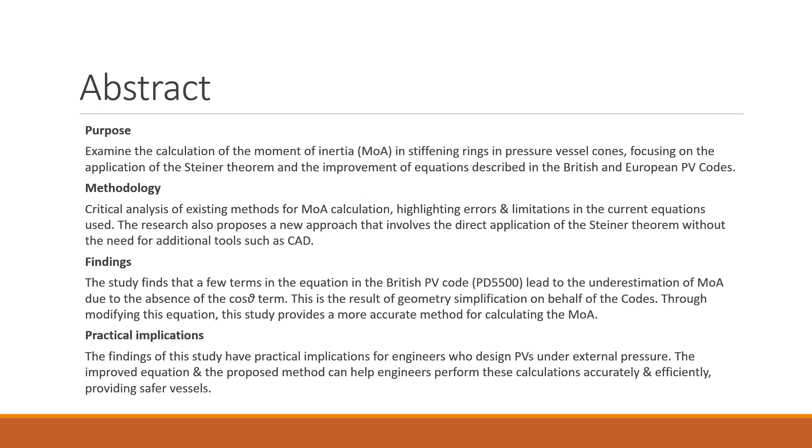As I mentioned earlier, the purpose of this study is the calculation of the moment of inertia in stiffening rings in pressure vessel cones, focusing on the application of the Steiner theorem and the improvement of the respective equations in the British and European pressure vessel codes. Let me begin with some background on pressure vessels and why accurate structural analysis is so important.

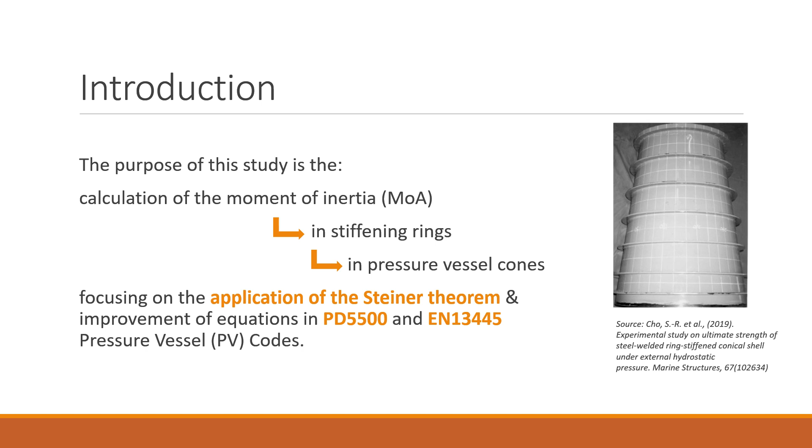Pressure vessels are critical containment components used across many industries to safely store, transport, and transfer compressed gases and liquids. They feature a hollow cylindrical or spherical shell designed to withstand various pressures. As material and manufacturing costs rise, thinner vessel walls are often specified to reduce weight and expenses. While this leads to lower capital expenditures, it also magnifies the need for reliable structural analysis during design.

Thinner shells are more prone to deformations like buckling if not properly reinforced. This is where stiffening rings play a key role. Stiffeners are structural elements attached around a vessel's circumference to enhance its integrity under pressure loads. Proper sizing and positioning of these rings is essential to prevent catastrophic failures.

A fundamental parameter in stiffener sizing is the moment of inertia. This property represents an object's resistance to bending and twisting forces based on its mass distribution. Higher moment of inertia equates to greater structural strength. Calculating the moment of inertia accurately is critical for engineers performing stress analysis on stiffened pressure vessels to ensure they withstand rated pressure safely throughout their design.

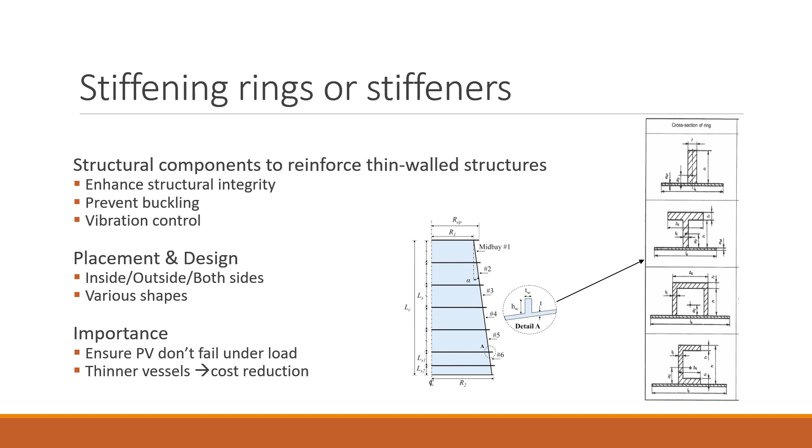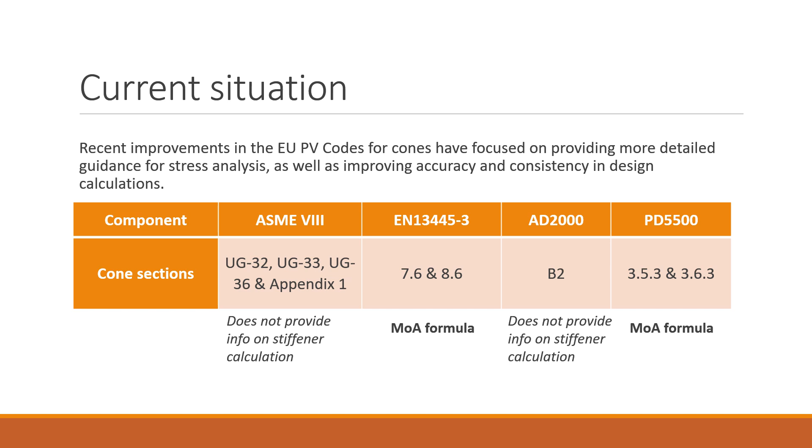It was in reviewing international pressure vessel codes for guidance on moment of inertia calculation that my colleague and I noticed some shortcomings. Two major pressure vessel codes, the US ASME and the German AD 2000, simply mention that to calculate the stiffeners, the moment of inertia of the cone stiffener cross-section combined should be calculated without providing any more details. The other two main standards, the European EN 13445 and the British PD 5500 codes, provide a formula for the calculation of the moment of inertia.

As said, the moment of inertia of a stiffening ring is a fundamental computational factor in order to determine whether it can hold the shell to which it is welded under external pressure. The main issue identified during calculation of cone sections under external pressure is that the formulas provided by the European and British codes are only valid for one type of stiffener, the T-type, which is shown in the picture on

the right. To accurately design the vessel, a systematic examination of existing methodologies for determining the moment of inertia of other stiffener cross-sections on conical parts, such as the one shown at the bottom, was necessary. The literature research performed led to the Steiner theorem application.

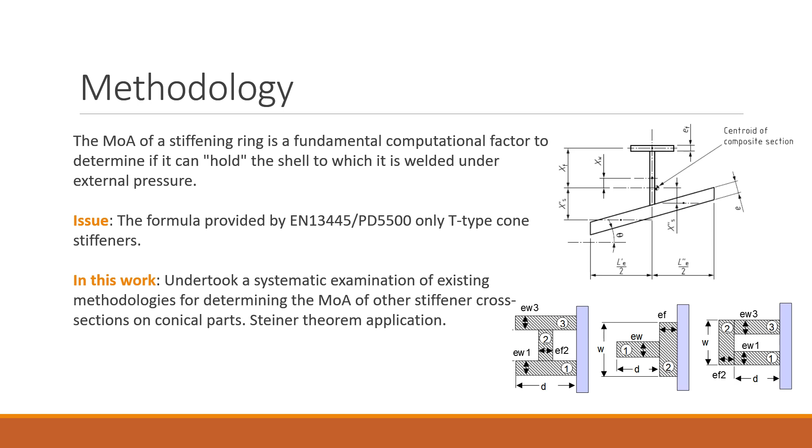Over the past year, we delved deeply into the underlying theory behind existing moment of inertia calculation procedures. We started by studying the mathematical foundation, Steiner's parallel axis theorem. This fundamental rule states that an object's moment of inertia can be determined about any axis by knowing its inertia about a parallel axis through the centroid plus the product of the area and the square of the distance between the axes. When combined with axis transformation equations, it provides a comprehensive framework for engineers to calculate the moment of inertia of various geometries with precision.

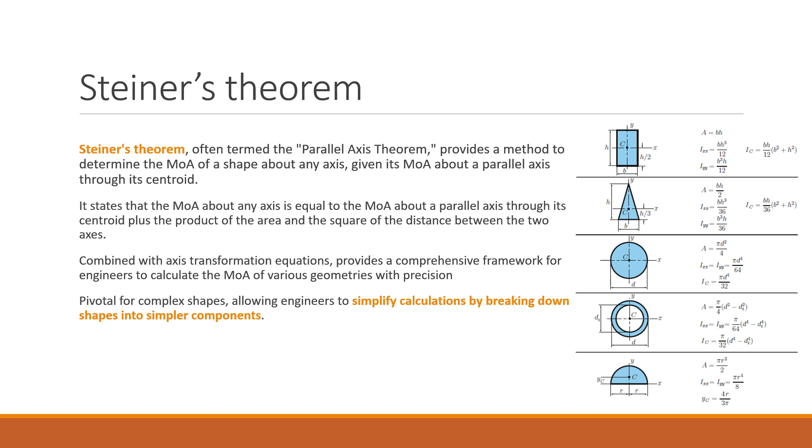This is pivotal for complex shapes, allowing engineers to simplify calculations by breaking down shapes into simpler components such as rectangles, triangles, circles, rings, etc. According to the Steiner theorem, a T-stiffener cone cross-section can be represented by three different simple shapes: a parallelogram representing the cone wall, and two rectangles, one for the web of the stiffener and one for the flange of the

stiffener. For each of the three shapes, its moment of inertia to its center of gravity needs to be calculated, as well as its area and the distance between the axis of the center of gravity of the shape and the axis of calculation. With the addition of the angle of the center of gravity axis to the axis of calculation, a complete set of equations is set to calculate the total moment of inertia of the stiffener in relation to the cone axis, as it is required by the pressure codes.

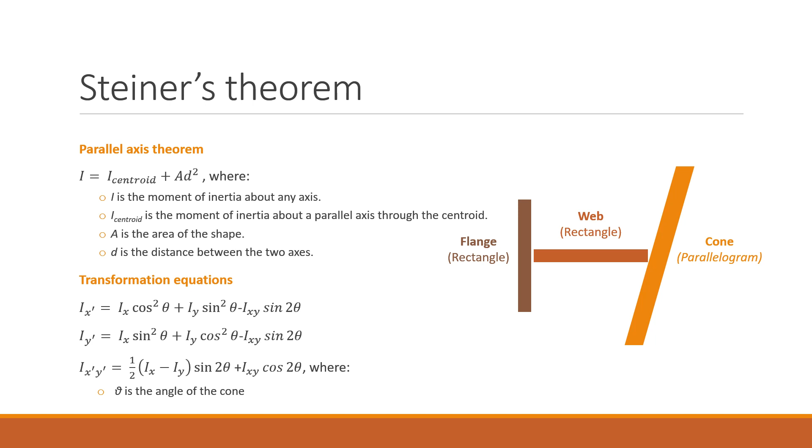This calculation is illustrated through an example to allow a better understanding of the methodology adopted. Assuming a T-type stiffener on a cone section at an angle of 15 degrees and a thickness of 20 mm, the web part of the stiffener having a length of 91 mm and a thickness of 9 mm, and a 15 mm thick flange with a length of 200 mm, the flange and the web area are simply calculated, and also calculated is the centroid position, which is the center of mass.

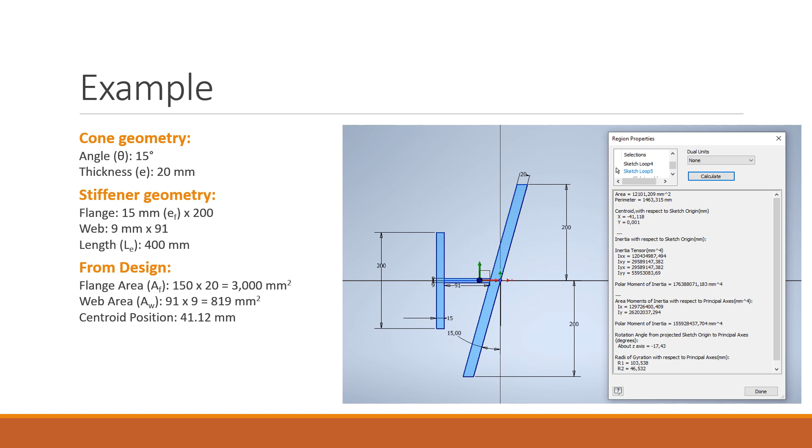Next, we calculate the moments of inertia for the flange and the web, as well as the positional values for the flange, the web, and the cone section, which are required by the formula shown on the right, the formula used by the European and British pressure vessel codes. Applying all of these in the formula, the total moment of inertia of the cross-section is calculated. And one other thing that is clear from the analysis is that the codes also apply the Steiner theorem to produce the formula for the calculation of the moment of inertia.

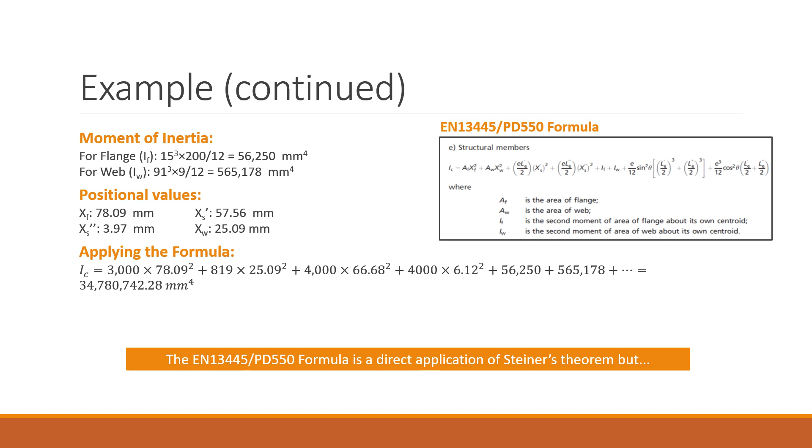Through a more careful study of the formula provided in the code and cross-checking with the geometry, it is concluded that the cone section geometry is simplified in the pressure vessel code, as it represents the cone geometry with a rectangle shown at the top, even if the code demands that the calculation is performed for the cone central axis, axis X, shown here. This simplification could be valid and not impose a great error, as long as the cone angle is within a few degrees.

In our approach, the conical part section is represented by its actual geometry, which is a parallelogram, as shown at the bottom, and the Steiner theorem is reapplied to produce the moment of inertia calculation. It is shown in the simple shape equations on the right to calculate the moment of inertia to the shape centroid that these two shapes yield different results.

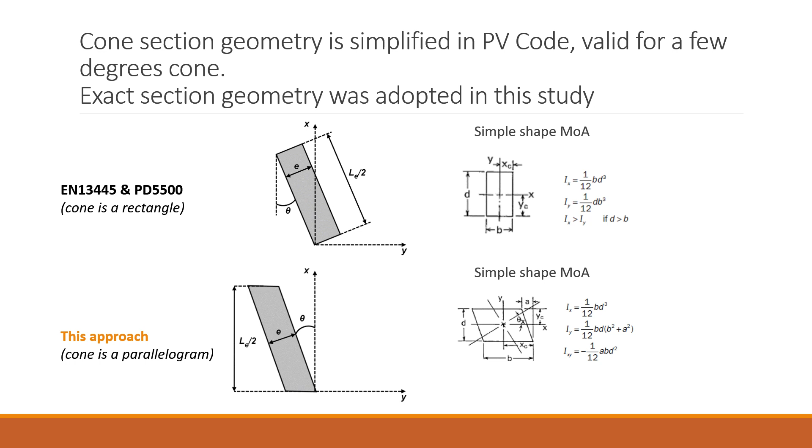For analytical examination of how Steiner's theorem was being applied in the pressure vessel codes, we identified differences in the approaches for conical sections. More specifically, terms 3 and 4 of the code formula omit an important cosine factor tied to the true parallelogram cross-section shape of cones. These terms represent the cone section parallel transformation according to Steiner's theorem. The implication by this simplification is the underestimation of the moment of inertia due to the absence of the cosine term.

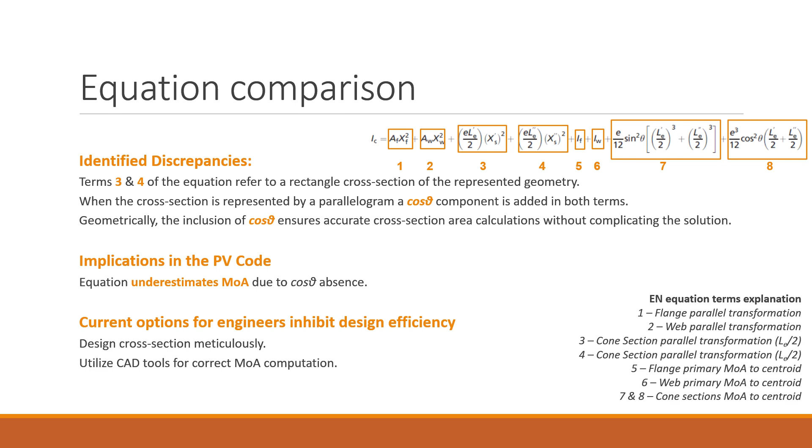To address this, a modification was proposed directly applying Steiner's theorem using the accurate geometry as defined by the cone angle rather than a simplified rectangular approximation. Moreover, since the formulas applied by the British and European codes are only valid for T-sections, current practice for designers is to design the cross-section meticulously and utilize CAD tools such as AutoCAD to get the correct moment of inertia calculation.

With the proposed approach, the British-European formula is replaced by a direct application of the Steiner theorem, which is also included in our cloud-based tool vClavis. With this approach, no external tools such as AutoCAD are needed. Moreover, the correct geometrical representation of the cone section leads to much more accurate results.

In the present example, at a 15-degree angle of the cone, the code formula shows an absolute relative error of more than 2% compared to the moment of inertia, as it is calculated through the mass prop function in AutoCAD, which is a well-established tool among engineers. With the proposed solution, the absolute relative error is smaller than 0.006%, which is practically identical to the analytical exact solution produced with the advanced CAD tool.

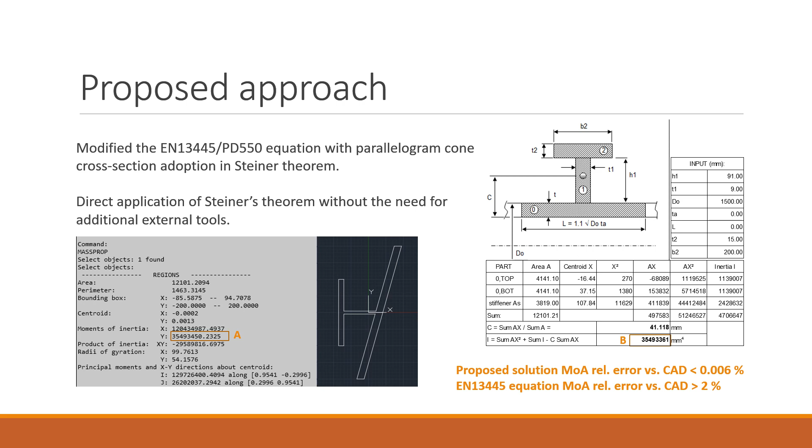For testing and validation, we developed detailed CAD models of sample stiffened cones across a range of typical design angles from 2 up to 45 degrees. Our proposed equation was then applied and the results were compared. The graph shows the absolute relative error of the code formula versus the analytical solution, which is identical to the proposed solution. For the same T-section stiffener, the two approaches show an exponential difference in the moment of inertia calculation for cone angles ranging between 2 and 45 degrees.

For cone angles up to 10 degrees, the relative error between the two approaches is less than 1%. However, for higher cone angles, the code formula severely underestimates the moment of inertia, up to 50% for a 45-degree cone angle. This leads to increased material cost and pressure vessel weight.

Indicative numbers are shown here to highlight the material increase required for a cone angle of 20 degrees, for example. To match the moment of inertia provided through our solution, the classic approach would need to increase either the cone thickness, the flange thickness, or the flange length by the percentages shown in the bottom table.

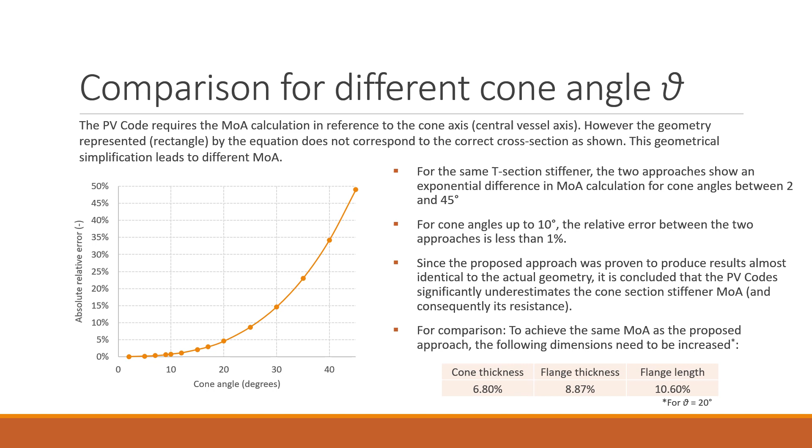The most significant conclusions produced in this study are that the EN and PD underestimate moments of inertia, leading to heavier and more expensive stiffeners. The proposed solution facilitates the calculation also for various other stiffener geometries, allowing engineers to achieve higher efficiency in stiffener calculations without needing external tools.

In closing, through our rigorous examination uncovering theoretical flaws and quantification of inaccuracies, we believe significant improvements can be made to pressure vessel analysis procedures and codes. Our improved moment of inertia calculation method more accurately represents vessel geometries.

With confidence in more precise stiffener sizing, engineers can now realize performance targets more optimally without compromising safety margins. It is our hope that modern standards will consider incorporating approaches like ours to strengthen the structural reliability evaluations industry-wide moving forward.